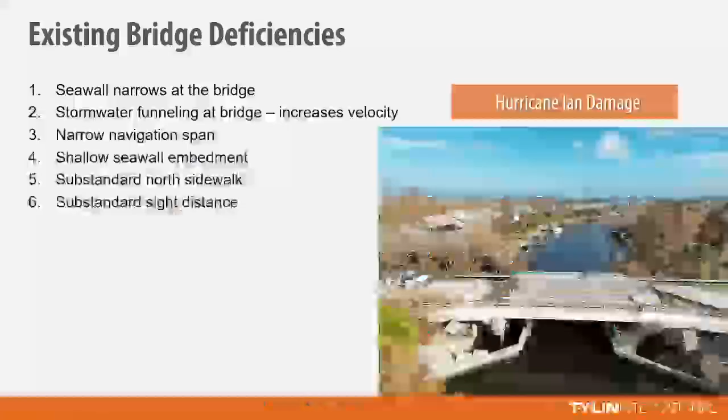This bridge was built in 1969 and served out the purpose of its design life. Unfortunately, facing the hurricanes, the 2022 Hurricane Ian kind of took it out.

You can see the picture we took during the hurricane, showing the foundations and substructure got a little damaged, but mainly the support actually opened up during the hurricane. The seawall is narrow at the bridge compared to the neighborhood seawall, which is about 100 feet wide, while the bridge seawall is only 30 feet.

Also during the hurricane, the storm funneled through that location. When the storm comes, this bridge is supposed to be underwater based on the 100-year flood conditions or storm event, and once the water rushes through, it washes out the entire support structure below it. Fortunately, on our bridge, the foundation is still standing so we can repair it and get traffic going immediately.

It has a very narrow navigation span, only 30 feet, which is narrow for most vessels trying to pass through it.

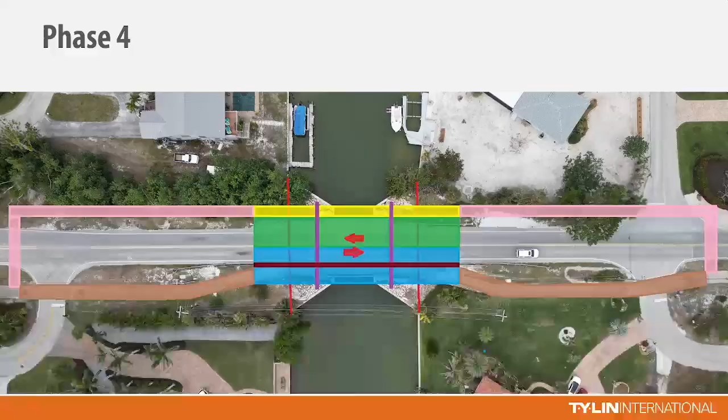For the estimated schedule, the contract is anticipated to require award probably by April 2026. To acquire the material to build the bridge will take 4 months, and then initial mobilization will be 1 month for the contractor to set equipment on the field.

Phase 1 will be 9 months with no traffic impact, since we moved the north pedestrian bridge first. Phase 2 will be 9 months of one lane, two-way traffic. Phase 3, we move the traffic down south, and you'll have two lanes each way — normal operations. Phase 4 is basically resuming existing traffic operations and building the barrier wall.

And that concludes my presentation. Thank you very much. Council, questions?

John, go ahead and lead us off. If I may, on phase 1 and 2, you show...

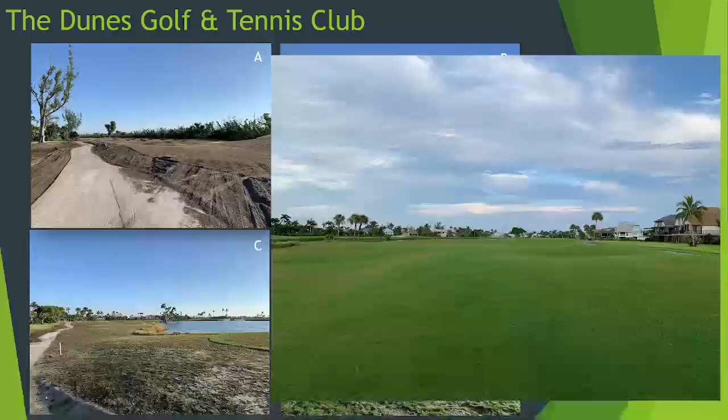On a sidewalk — excuse me, north side. Can we go back to the current presentation?

Yeah, oh, that's you. I shot a 7 on that hole the other day. Okay, I looked up and — what's the par? It was Groundhog Day all over again.

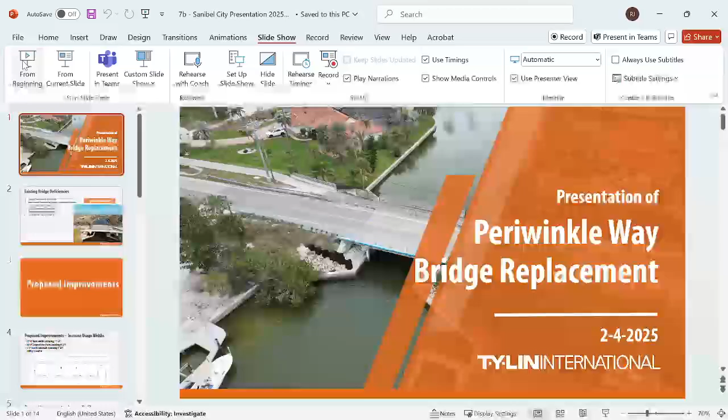Can we go back? Got it. If you go to phase 1... yeah, thank you, John. That one, or the next one, and the next one. Advance, yeah, phase 1, there we go.

What's in yellow, that's going to be a sidewalk on the north side of the bridge? Correct. That's going to be a sidewalk on the north side of the bridge. Let me show you.

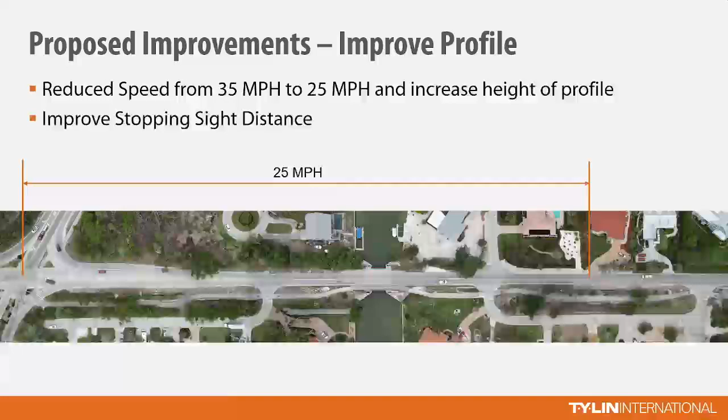And will there be a barrier between that sidewalk and the road itself? Yes. See, we have two sidewalks. One is on the north side - this is the north side. And then you have the south side, which is a shared use path.

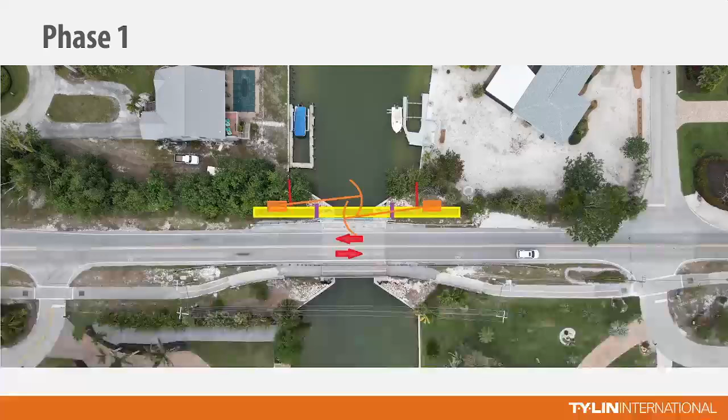So we're going to build the north side sidewalk. You're going to have a much more narrow sidewalk at this point, but you allow the pedestrian traffic, it's not stopping. And then go to phase 2, you're extending that all the way past Limpet? The phase 2 will build all the way to the south side, and it's actually a wider bridge.

Because we need a 10-foot shared use path compared to the 8-foot, and also the 12-foot lane, it pushed the entire bridge southward. So we built that during that time to allow the two-way traffic to be able to proceed afterward. The question I have...

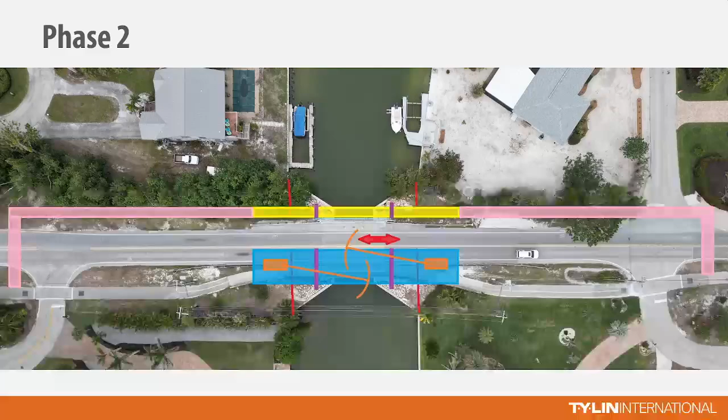If our overall plan for the future might be that we would look at a bike lane, is there feasibility to at least put a bike lane from Limpet all the way to the Causeway Road? The shared use path is supposed to be used for... let me go back to the typical sections. Yeah, I can appreciate the shared use path, and that's for walkers, bikers, everybody. A bike lane would be for the faster bikers.

Instead of having two sidewalks, shared use path on both sides, could we consider putting possibly a bike lane instead and move the barrier north so that you have basically a wider shoulder with a bike lane? Yes, that's just my thinking anyway.

Okay, I will give you an option here. The shared path can be used for bike lane and pedestrians, that's the reason why we use 10 feet. But to answer your question, can we add the bike lane into it? Yes. By moving this barrier right here at the utility corridor, making the utility corridor a lot smaller, you can have a 4-foot bike lane.

And the barrier would be north of that. That way you've got a wider shoulder, and you can use that for a bike lane if we ever contemplated putting a bike lane all the way through. Correct, because that allows you to have a 4-foot lane - a little bit not the current FDOT standard, but it's still accepted for a 4-foot bike lane. Most of the new FDOT standard bike lane right now is 7 feet.

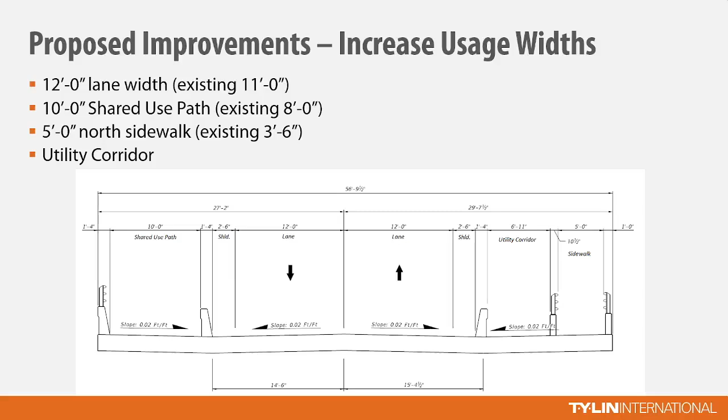I think what we'd like to do is gather council's input in terms of the cross-section changes you'd like to see, and then have our consulting engineer and staff work through the options to achieve the bike lane that they can study. I just don't want our consultant committed to that reduction in the utility corridor until we have that collaboration. But we want your recommendations on cross-section changes. That would be very helpful.

The other question I have, and I've experienced this going east, is people walking across from Limpet to the shared use path. That's pretty dangerous because you're going up, it's blind, and then you're coming down. I know you're proposing a 25-mile-an-hour speed limit, and I think that's probably good. However, I don't know how compliance is going to be achieved when you have a 35 for the rest of it. Those coming from the east, from East Gulf and going over the bridge, are probably going to continue at 35 when they get to the other side heading west. So it's going to be a pretty difficult issue to monitor and control.

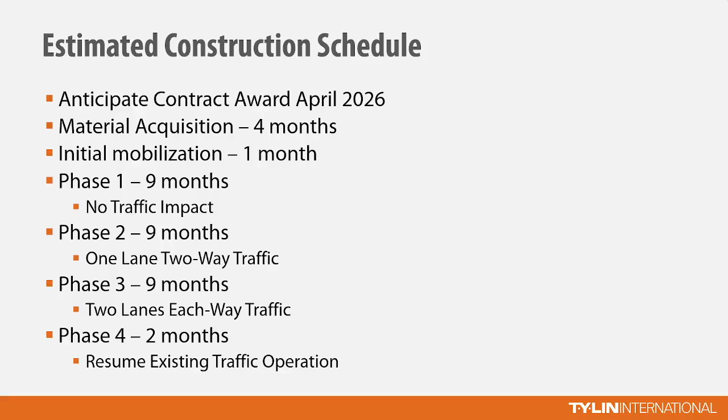That's correct, yes. There are several reasons behind it. You can repair the heck out of it by continuing to repair, but you're throwing money that's not useful for the entire life of the bridge. A new bridge will be much better in this condition because, during the inspection report, the bridge substructure has a rating of 5. 5 is considered fair, 4 is in trouble. So basically you're on the borderline for the foundation.

I can tell you that the current bridge piles that support it are only 10 feet below the embedment length of the seabed. We have a project coming that's supposed to do protections with the riprap below it, and it didn't actually happen before Hurricane Ian already hit. During this time, we know that the piles don't have sufficient length. That's the reason for the urgency that this bridge needs to be replaced as soon as we can.

Okay, thank you for that. I'm sorry, could you remind me, so the pilings for the new bridge will be a lot deeper into the canal, correct, underneath? Yes, because it will be past what we call the scour effect.